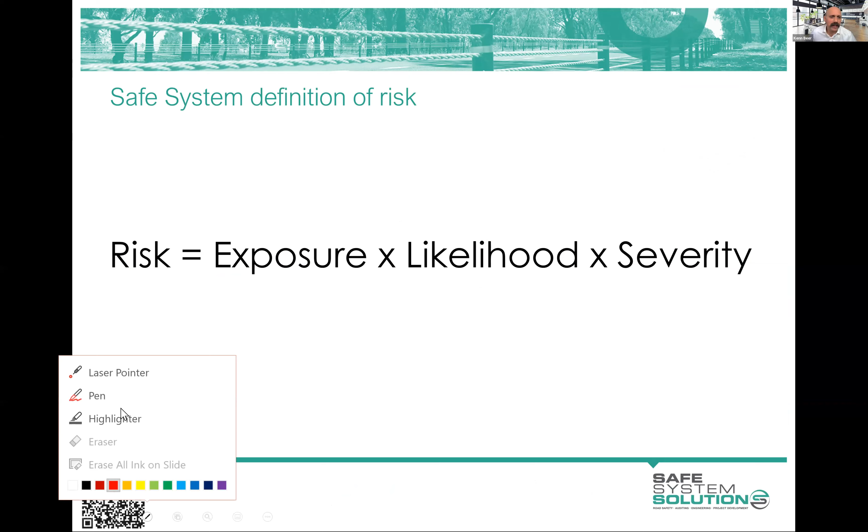We've had most people seem to do pretty well in the likelihood and severity aspects, and differentiating those two - what influences likelihood, what influences severity. We had a little bit of confusion on exposure, and that's understandable. It's a little bit hard often to get our head around extracting exposure out from likelihood in a risk assessment perspective, because it's not a common thing that is done.

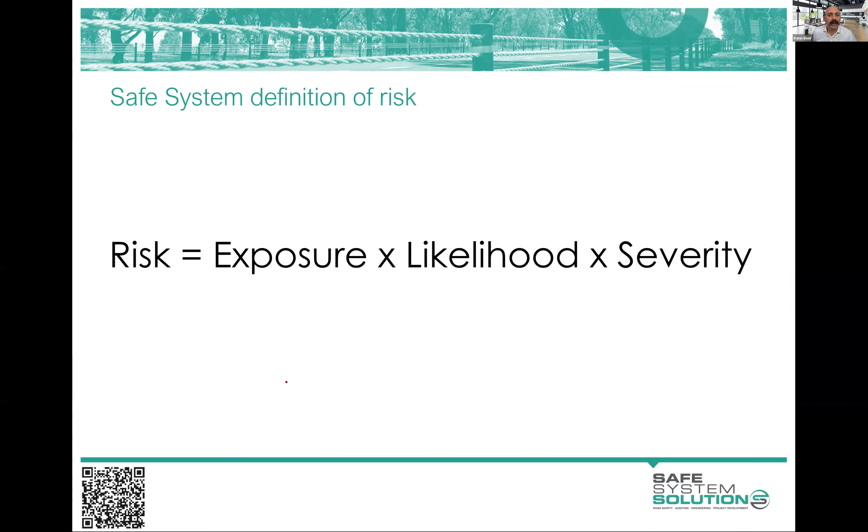Let me remind you briefly - we've got the example here of blocking the intersection off, closing an intersection, which stops the vehicles going through and reduces the number of vehicles being exposed to this level crossing. And also the potential to completely separate a vulnerable road user so they're not exposed to crashes with passenger vehicles - these completely separated shared path or cycleway facilities. They're two examples of exposure.

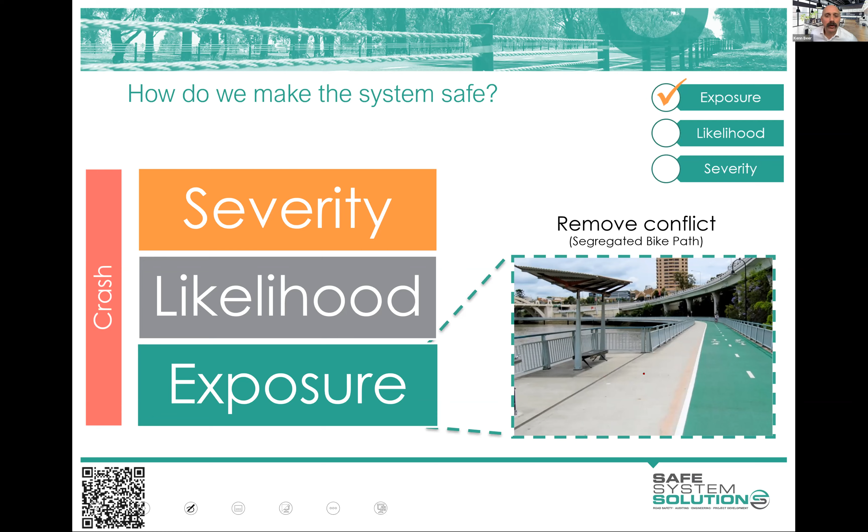But I think it also helps if I read you a definition out of Austroads, the Safe System Assessment Framework. This refers to road users - in what numbers are using the road and thus exposed to a potential crash. The key here is the measure of exposure includes AADT, side road traffic volumes, number of motorcyclists, cyclists, and pedestrians. So it's numbers, it's numbers. How do we influence the numbers of road users exposed to that crash?

And because this is a fairly new, challenging area, for some of the scoring and how you allocate things, we wanted to try and ensure consistency across industry. We've got the Austroads Safe System Assessment Framework, and there's some jurisdictional guidance, at least from Victoria, from South Australia, and Queensland's got a few little bits and pieces ticking along as well. But there are still quite a number of gaps or things that people haven't quite clarified.

We've filled that gap for the moment with some fact sheets, scoring fact sheets, and we've made those available on your memory stick and in Moodle. So you'll be able to flick to those if you're scratching your head on a few things, like when does a bike facility influence - so when would we allocate it to exposure, likelihood, or severity?

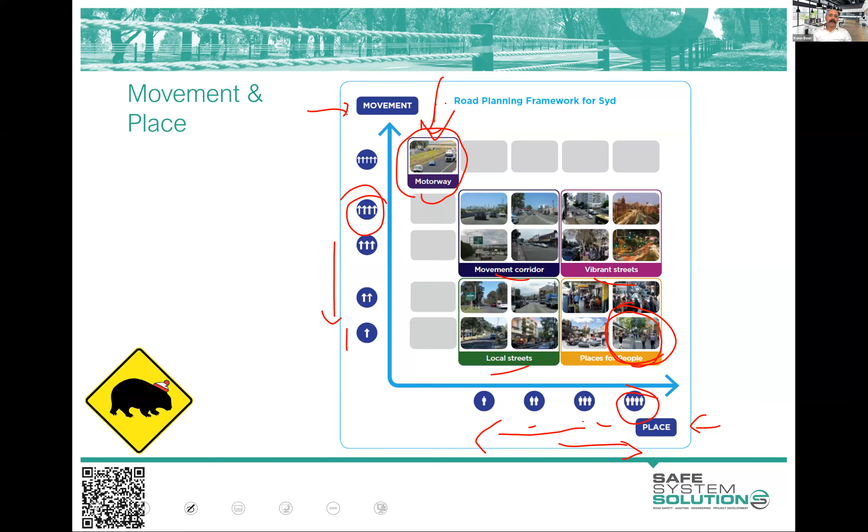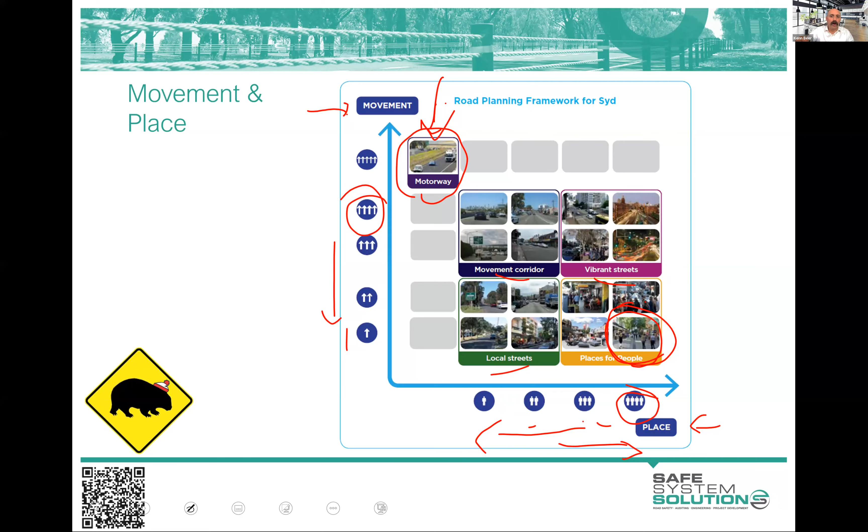The places for people - it's been fun to watch the tactical urbanism going on with COVID, and some routes that were probably more vibrant street related got pulled into more place for people related areas, which was fun to watch with the planter boxes coming in, or the street dining bits and pieces going on. That's been interesting to watch.

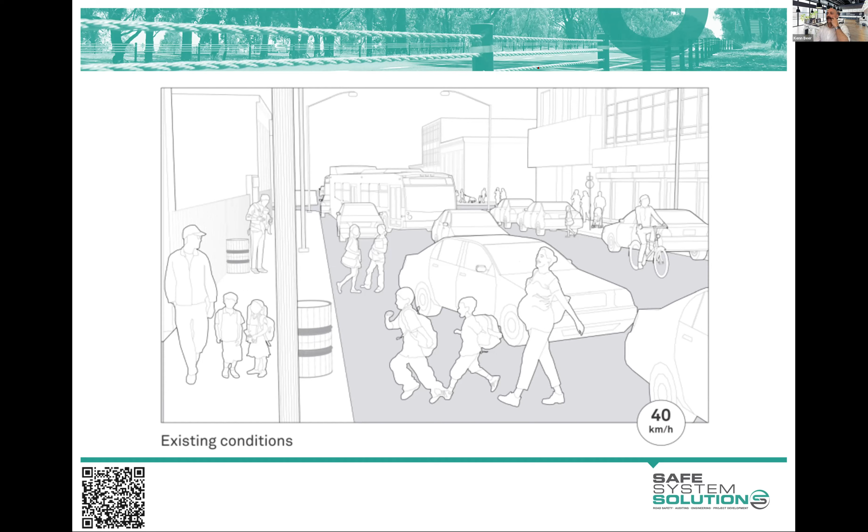And lots of people are thinking about shared zones and very low speed spaces, and that's all wonderful stuff for encouraging these places for people. So well done. Let's have a look at a little artistic impression, and I think it's pretty good what they've done, but I think there could be some alterations.

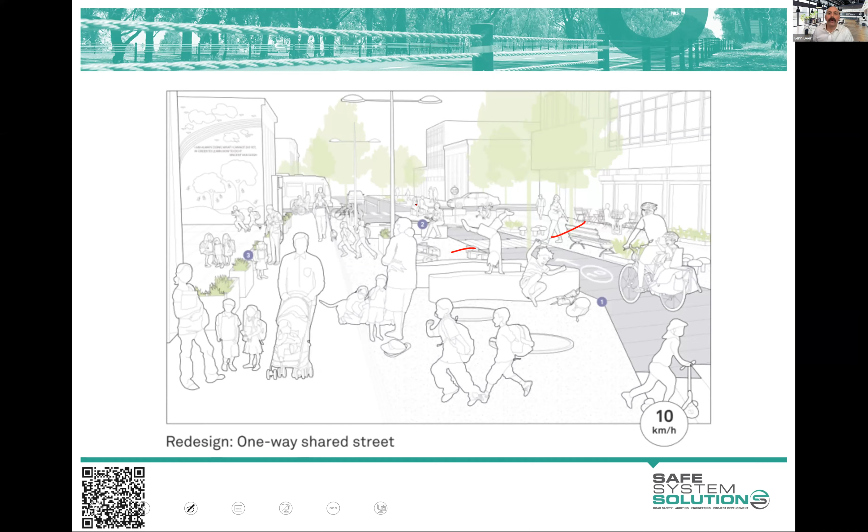Again, it's an artistic impression, so don't take too much out of it. But the idea being, look, you've got a more attractive place to play, to hang out, and this must have a little bit of movement function because I've still kept it open. As I said before, I wouldn't necessarily have a crossing point like this. I'd try to, as many of you did, make this all a shared zone area, but as your movement requirement increases, it would be appropriate to have that.

But you can see immediately there that it's a much better place for people, and you can intuitively see it's going to be lower speed, lower severity of crashes, lower likelihood of crashes as well, and probably lower vehicle volumes.

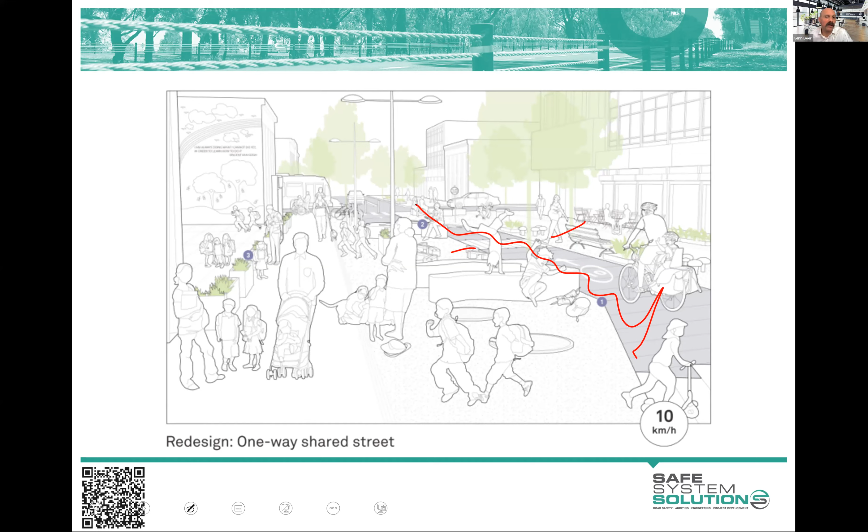And you really wouldn't want to be seeing places for people anything above 30 kilometers an hour. It's really pushing your boundaries of what a place for people should be operating at. They really are slower, the much slower areas.

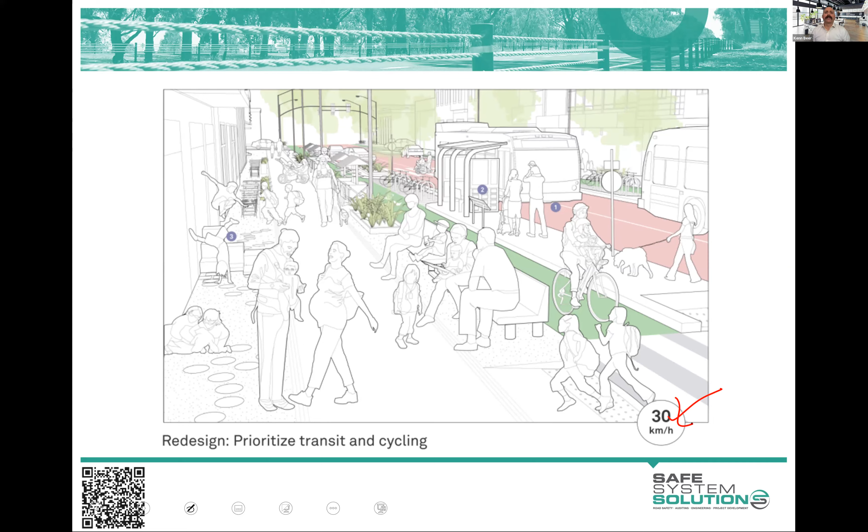Local streets are an interesting one. We would categorize them with low place value. Now, little tip: if you're doing community consultation with the local residents, tell them that we believe your street has low place value. I'd particularly like to hear that, because we're thinking about it from the holistic context of the entire transport network,

the whole strategic roads and streets network. But yeah, we also have low movement function. And when you get yourself in these sorts of categories, the ability to lower speed significantly is within what you can do and appropriate, due to the fact that we don't have that movement requirement. Admittedly, we don't have the place value, but we need to get our safe system alignment up, and utilizing speed reductions as the technique to do that is sort of the appropriate one in these local street environments,

using raised crossing points as an example here, or slow speeds, or blocking off rat runs, like streets where people are going through. So lots of ways we can alter these road environments. We do not need to be getting vehicles through there at any speed.

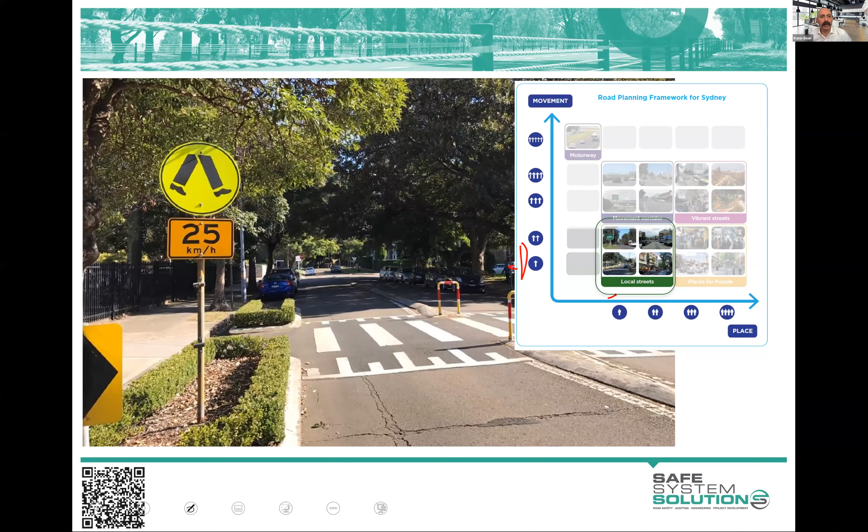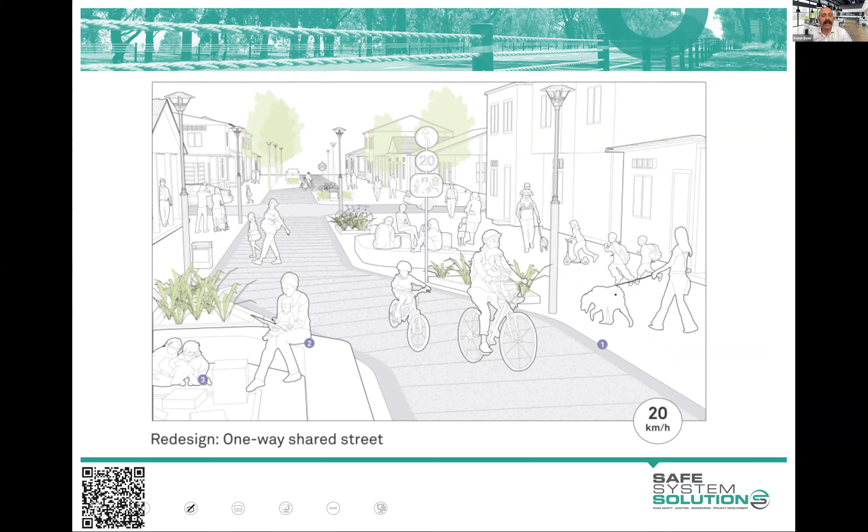But let's jump to vibrant streets, because that's a harder category. And again, I'll get you to do a little bit of thinking around this. The vibrant streets one really is challenging due to the fact that everything's a priority.

And I worked on an Austroads project called Safe System Infrastructure for Mixed Use Arterials. And it is really that challenge that you find everything seems to be a priority on these roads. It's a traffic priority route. It's a pedestrian priority area. It's a priority bicycle route. It's the public transport route. And everything seems to be of high importance.

So the first thing I do with a group, often when safe system assessing, is to ask: can we get an indication of whether you'd like it to be more place for people, or you'd like it to be more movement corridor, just to get a bit more of an indication of how we can operate this area. But sometimes you don't get that.

And so we are now in this situation where we're trying to create higher alignment with safe system principles, recognizing this has a high movement requirement for people and goods in whatever form we can move them in, and it has a high place requirement, and we need to try to operate this with high alignment with safe system principles. So let's play that out in an exercise, shall we?

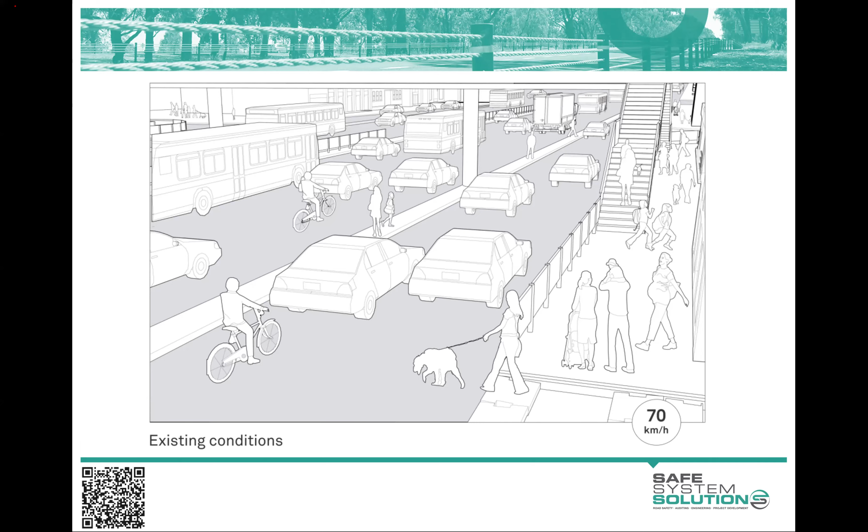Okay, again, seeing some really great input from people here. So we've got people wanting to replace service roads with segregated cycle paths and wider footways.

Aaron's got an interesting idea there, and I didn't set a budget limit, to underground all the traffic and completely remove all exposure, thus leaving us the ability to do whatever we want with that area. And that would be the ultimate, wouldn't it? We would get extremely high alignment with safe system principles, good movement potential through there, and we would be able to create a high place value. So in theory, that's a wonderful thing to look at. Obviously some big costs associated, but the principles are very good.

So a lot of people want to take some lanes to convert to cycle space, and I think that's a really smart thing to be thinking about, because it is still movement that we are requiring. It also has the ability to lend some higher place value to the area as well as retaining movement. So these are good things.

And we've got good movement for cyclists. We've got good movement possibility for pedestrians as well. A nice thoroughfare for them walking, good public transport, and some vehicle through there. So your mix of holistic people and goods, hopefully some goods are able to get through there, is

If you can get a bit more consistency of that traffic flow, you do better. But certainly for other road users, in terms of cyclists being able to go through there, and pedestrians and others, we're in a pretty good state.

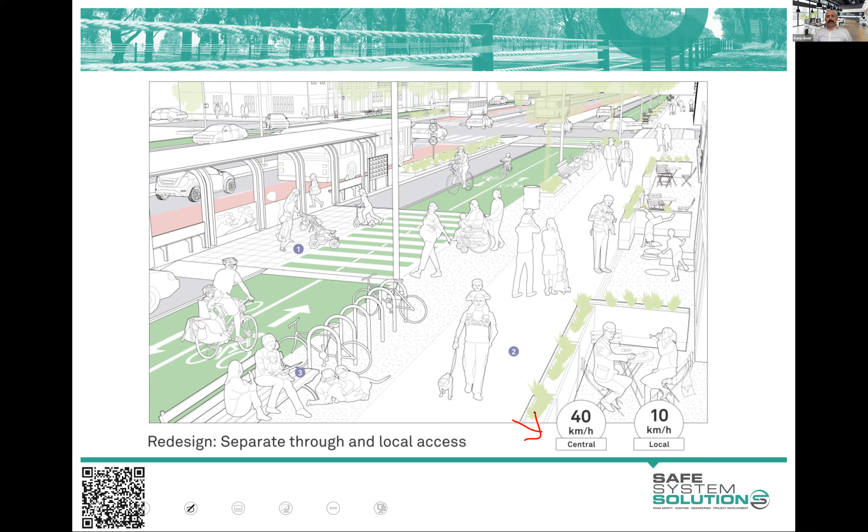And we see some interesting sort of separated cycle facilities. So Max, do you want to talk a little bit about any cycle facilities? Yes, I can probably hop into the next couple of slides there, Ken, when we go into the vulnerable road user space. But this is an example of a protected intersection. So making sure that cyclists crossing the intersection are actually provided some degree of separation from general traffic.

And interesting that you showed the Caloundra example there by Prue, because there's an example of a protected intersection up in Caloundra in the Aura housing development that they've got developed up there. So they seem to be ahead of the crowd for cycling infrastructure up there.

Okay, interesting one. I'm sure Prue knows it. She probably designed it. So the protected intersections and the like are really examples of areas trying to get us better place value, retain movement, and really consider movement of other road users rather than just passenger vehicles.

But the one thing I suppose I wanted to mention again is that a facility like this, in a safe system assessment, I'm going to categorize this as a reduction in the likelihood of crashes involving passenger vehicles and cyclists, not an alteration to the exposure, because I still believe that bicycle rider is exposed to crashes with passenger vehicles, either by a vehicle leaving their road and their lane and striking the cyclist, or turning in front of or out of these different points, but it's less likely that they will be involved in a crash.

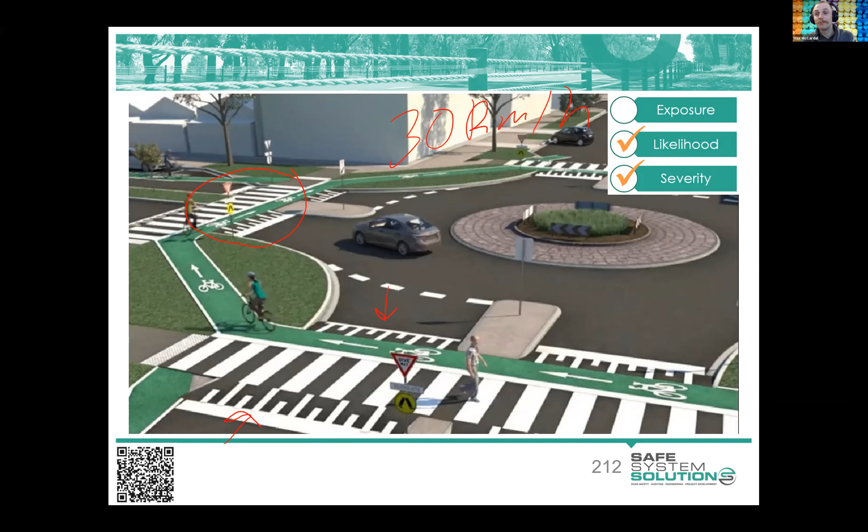So this example has actually been constructed. It's in Moray Street. If you are interested in this particular design, we can give you access to some footage and photos of how this actually looks on the ground, because it's a fairly bespoke treatment, and it's something we'd like to get used more and more. However, it's something we'd like to see more of applied across the network, because it beautifully addresses, as you can see in this diagram here, the likelihood of crashes occurring.

Cyclists and pedestrians are raised, so they're easier to see. And also you're reducing operating speeds, so vehicles have more chance to undertake emergency braking, or there's less stopping distance they need to worry about if a pedestrian walks in front of them. The severity is also reduced, as mentioned, with regards to that speed. So if you are reducing the operating speeds, you are affecting the severity there as well. So these are a really fantastic example of safe system thinking within the vulnerable road user space at roundabouts.

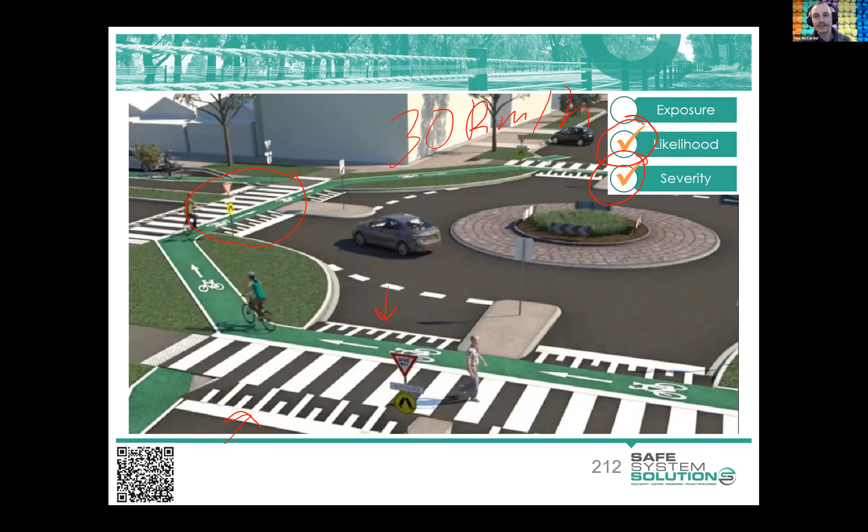So they're completely off road. Where they do cross at the major arterial, the high speed environment where you've got lots of large traffic volumes, the priority is given to general traffic, okay? So cyclists and pedestrians crossing have to stop and give way to general traffic as they pass through. On the other leg, let's assume the leg on the north and southern side of this roundabout is more of a minor leg, so that could be a local access road. It could be lower volumes and just a lower function of movement as well, so it doesn't have that same necessary throughput at the different legs, at the north and south leg there. So what we see instead is pedestrians and cyclists are assigned the priority, and they can travel straight through there with cars giving way to them. So you've kind of developed this roundabout reflecting on the different movement functions associated with the different legs of the roundabout. It's got a high movement function, you're keeping the priority assigned to general traffic. We've got a low movement function, you are assigning the priority back to our vulnerable road users and protecting cyclists and pedestrians. So a really big win here.

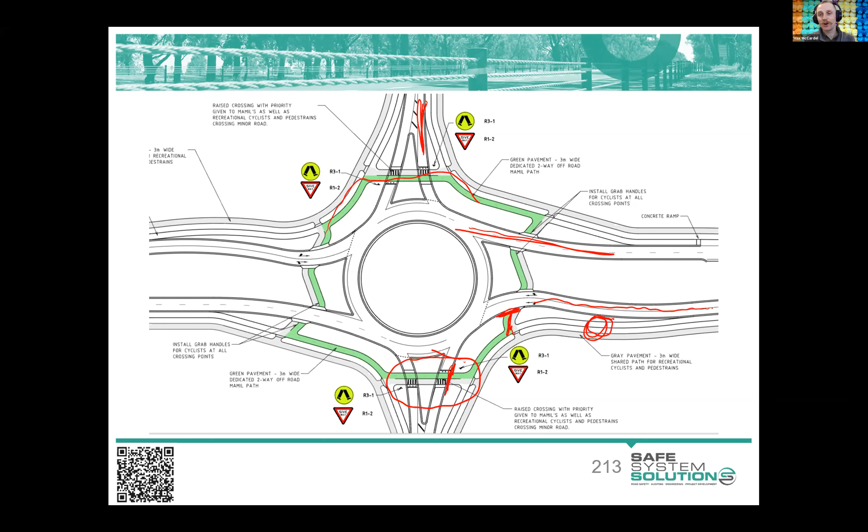For those that haven't seen them before, those are called sharrows, or shared arrows. That means cyclists claim the traffic lane, so general traffic has to share the lane with cyclists.

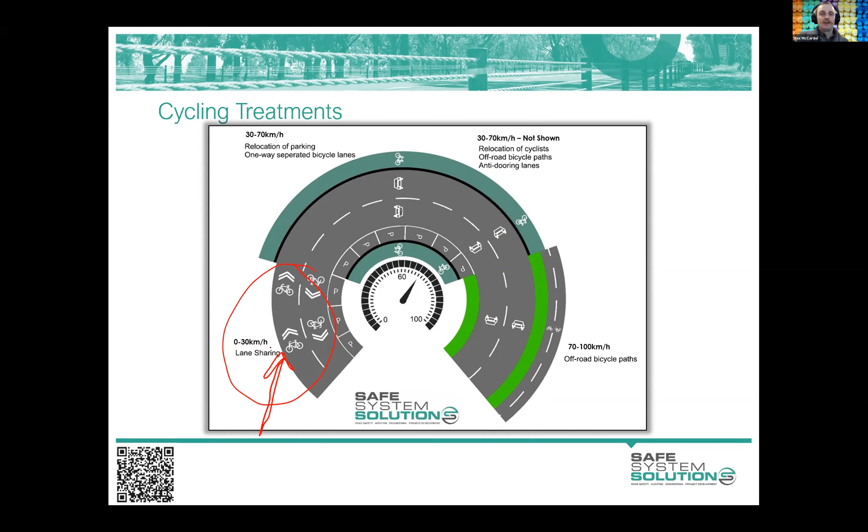Between the 30 and 70 km/h speed zones, we're looking at relocation of parking and providing separated bicycle lanes. That first slide I took you through, with the Copenhagen treatment, is generally appropriate for the 30 to 70 km/h range.

There's also appropriate infrastructure to bring in off-road bicycle paths within these speed zones, as well as anti-dooring lanes. If you haven't heard that term before, don't worry - it's not a prevalent treatment, but if you're interested, email me and I'll send some research on what it means.

But in these higher speed zones, 70 and above, we're definitely looking at bringing cyclists completely off-road, well away from general traffic. If you're looking at influencing your exposure, you'd want a physical barrier in place to shield errant motorists.

What that means is if a vehicle were to run off the road, they can't access the off-road bicycle facility - there'd be a barrier in place for them to collide with instead. Then your vulnerable road user exposure score could be affected by that intervention. Next up is pedestrians.

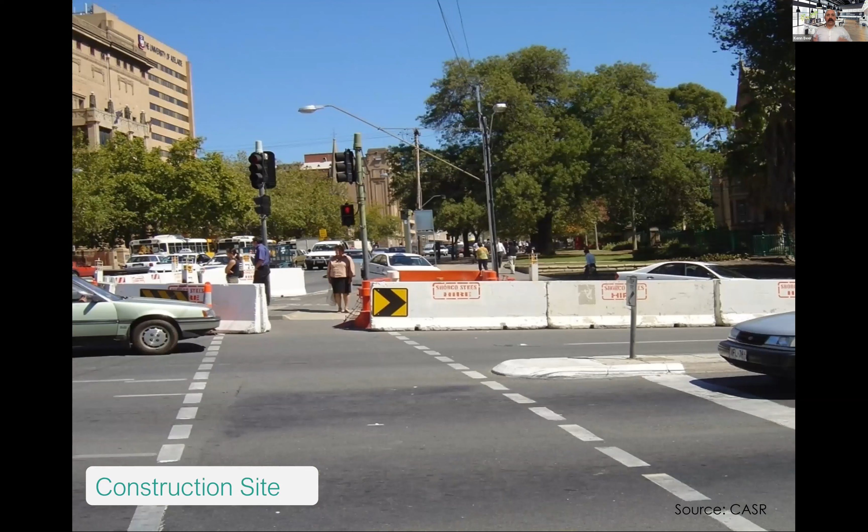So these raised crossings are really a wonderfully aligned safe system treatment. But overarching for pedestrians, I think this photo tells quite a story for me.

It's quite an old photo now from Adelaide - there were some people working in the median island, doing electrical work and bits and pieces, there for about a week. This road was 60 km/h, and when the work zone went in, it dropped to 25 km/h, which is South Australia's work zone speed limit for those who don't know. They put barriers out as well.

The workers finished their work, the barriers and everything went away, and the speed limit went back up to 60. Then about 3,000 pedestrians a day stand in that same island and cross the road. So you look at that and ask why - we know what safe system looks like for vulnerable road users like those workers, but we don't afford that to the general public.

Some people will say the workers are concentrating on their work so they won't be looking at traffic. The reality is pedestrians are usually concentrating on their phone, or intoxicated, or similar. So we need to step back and take more responsibility as system designers for the travelling public as well. But I think there are circumstances where we're getting better at it.

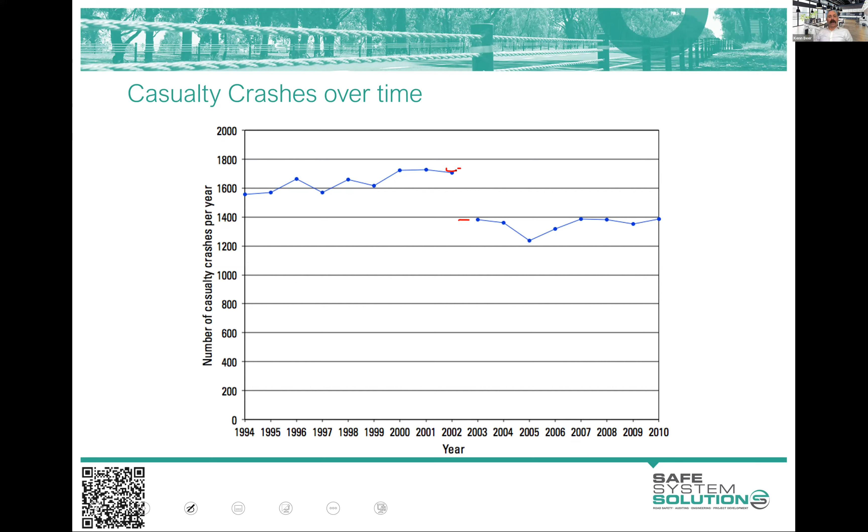Speed limit reductions overall are going to continue to give us wonderful reductions in pedestrian and cyclist trauma, and other trauma as well. Another example here is the year the default urban speed limit went from 60 to 50, and you see a significant drop in the number of casualty crashes per year, in a pretty wonderful way, just from that regulatory change.

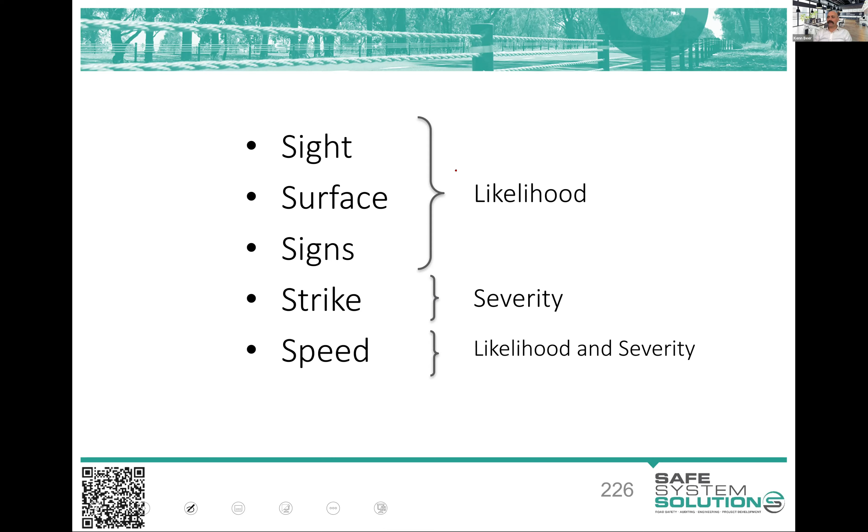Some recent research has emerged giving us more detail on the severity of crashes for motorcyclists across different crash types—with passenger vehicles, barrier impacts, surface embankment, trees, posts, and the like. I'll put the reference to that research at the bottom if you're interested in more detail. You'll have a pretty good gauge of it in your safe system assessment from the colourful chart we gave you earlier.

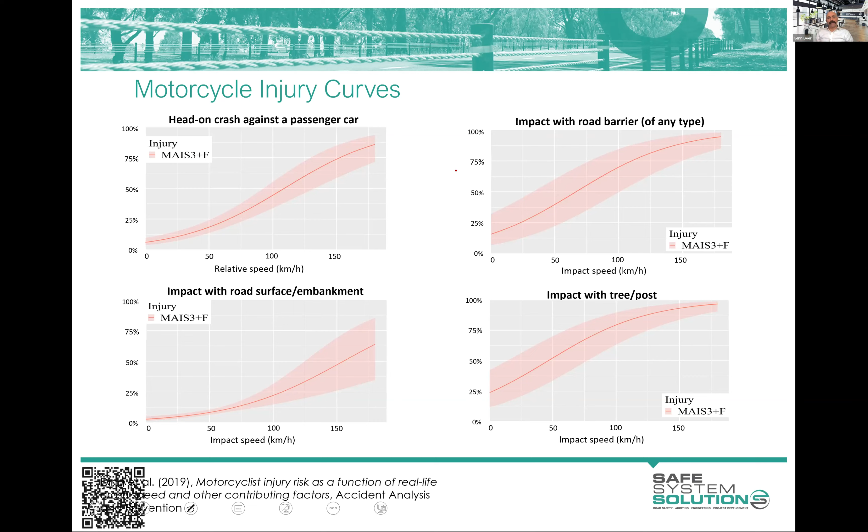You can refer back to these a little, but the thing is motorcyclists, from this recent research, sit a bit above pedestrians and cyclists, but have far less ability to withstand crash forces than passenger vehicles. Again, exactly as Max says, because there's no shell to protect them. Even with all the helmet, body armor and the like, they're not going to get anywhere near the survivable impacts of a passenger vehicle.

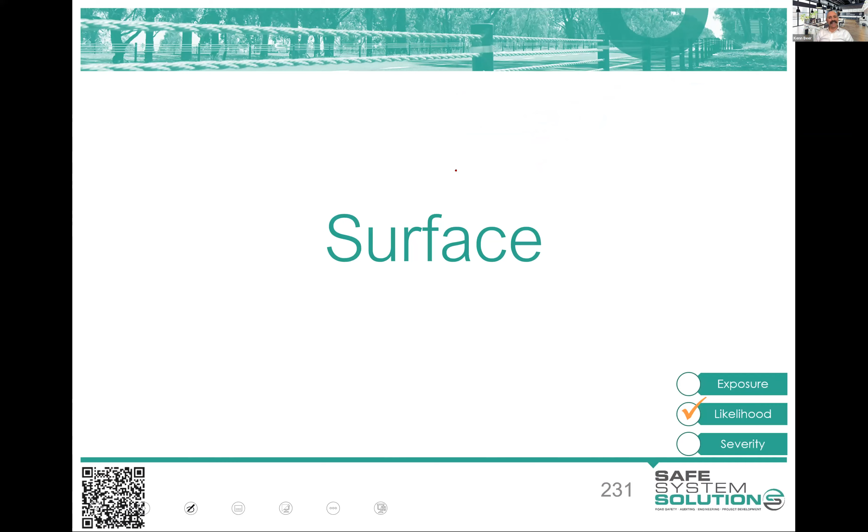So when filling out the likelihood of motorcycle crashes, you'd think about sight lines for motorcyclists and blocking, and about the surface provided and its likelihood of influencing crashes. We know motorcyclists lean when going around a curve or corner, have two small contact patches on the road, and the centre of gravity is shifted out.

So we know that any surface defect will be more of a problem for a motorcyclist than any other road user. Cyclists are up there as well, but we call motorcyclists the canary in the coal mine when it comes to surface defects. They're the first to be killed or seriously injured.

So you're looking for these sorts of things as a safe system assessor. What's influencing the likelihood of motorcycle crashes? A steel plate, thinking of it when it's wet and slippery, will significantly increase the likelihood of a motorcycle crash there.

And signs. We know that signs can help motorcyclists a lot. They're quite attuned to signs, warning signs, ways to inform, or particular signs you can get to warn motorcyclists specifically. Correct, consistent signage is so important in reducing that likelihood of crashes.

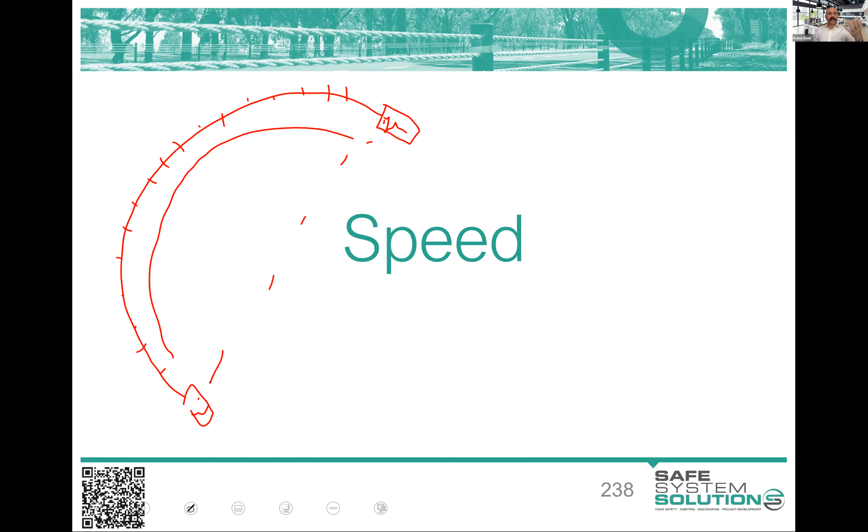I always say to the motorcycle community, there are so many far bigger things we should be addressing. I'm a motorcycle - I'm licensed, I'm too scared to actually ride on the public road network. But there are far bigger things that need to be addressed and should be addressed. So we shouldn't be spending all this time on wire rope barrier systems.

Anyway, speed. The appropriate regulatory speed limits, or here we see advisory speed limits - consistent advisory speed limits throughout the route reduce the likelihood, and potentially the severity, of crashes as well. Regulatory speed limit reductions and the like are very beneficial. The importance of consistency along a route is really big for motorcyclists. One of the challenges you have in these 100 km/h road environments for motorcyclists is, if we're going from 100 km/h to 80 km/h, our severity still sits in our maximum category, because we're still far beyond what could be handled in any crash type for a motorcyclist. So there are some significant challenges there.

Okay, so next session is all about this thing, but over to you, Max.